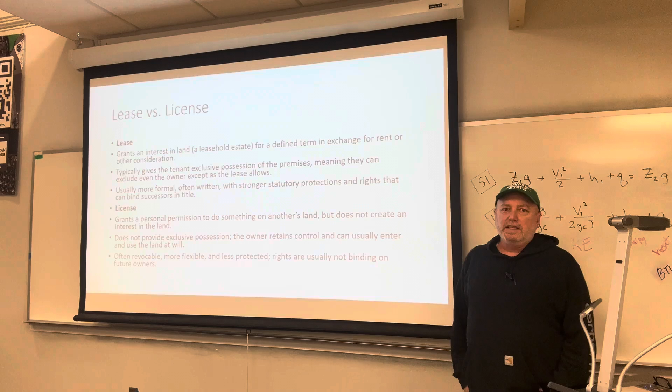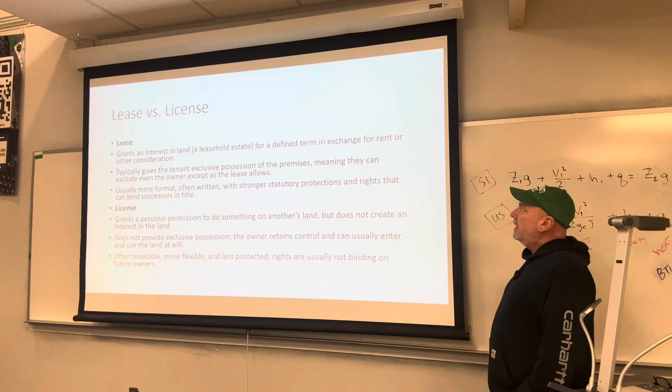This isn't in the book, but I wanted to touch on it at least: lease versus license. You can lease land, you can get a license. A lease grants interest for a defined term in exchange for rent or other considerations. Leases typically give the tenant exclusive possession of the premises, meaning they can exclude even the owner except as the lease allows. They're more formal, written, with stronger statutory protections and rights that can bind successors in title.

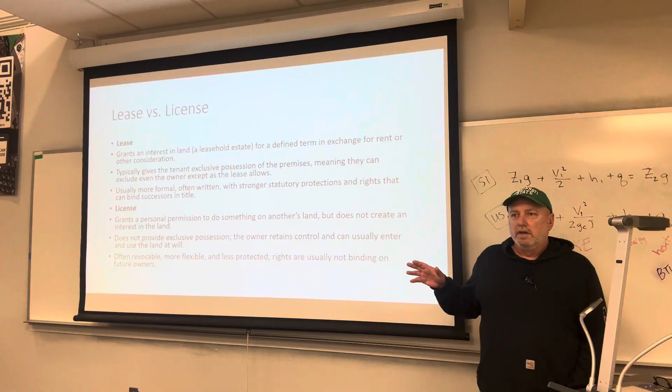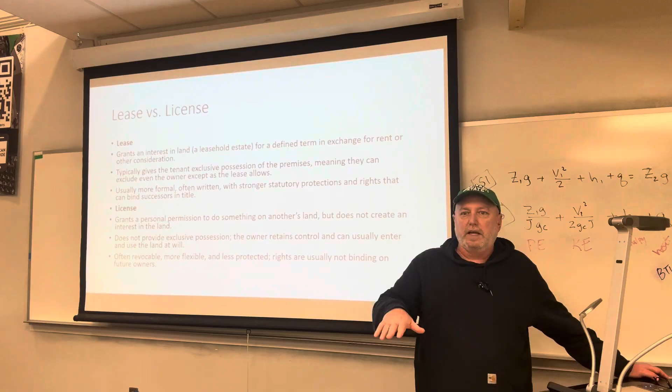As an example, some of you may be familiar with this if you're out in the more rural areas. A farmer has a 400-acre farm, maybe they're getting old, can't farm it anymore. They got a neighbor who's a young person with 20 acres. They could lease that farmland to the other person, and they have the right to come and use the land for farming. That's just an example, but it is defined as far as what you can use.

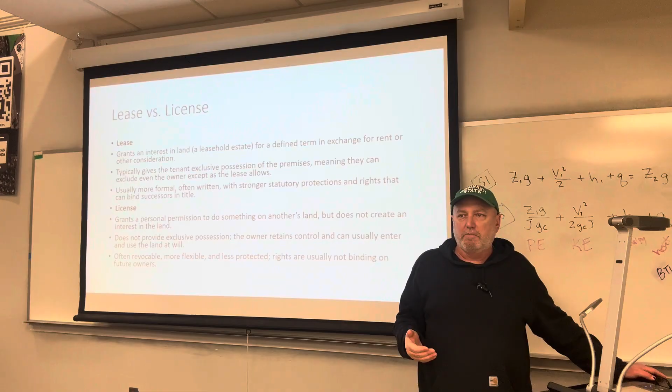I can lease that land to the farmer next door to come and farm the property, but that doesn't give him the right to come and build a house on it or build any improvements. If we specify in a lease purely for farming — maybe it even says raising corn, soybeans, whatever — it's for a specific reason and usually for a specific duration of time.

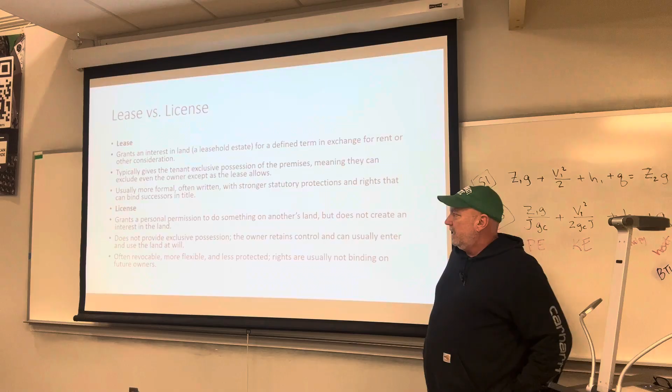You can get a license which grants you personal permission to do something on another's land but does not create any interest in the land. It does not provide exclusive possession. The owner retains control and can usually enter and use the land at will. It's often revocable, more flexible, less protected. Rights are usually not binding on future owners.

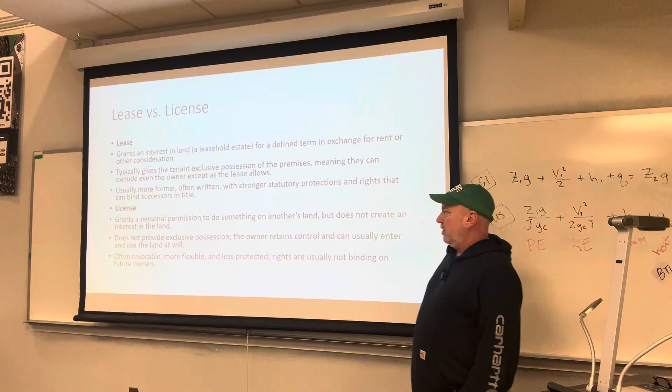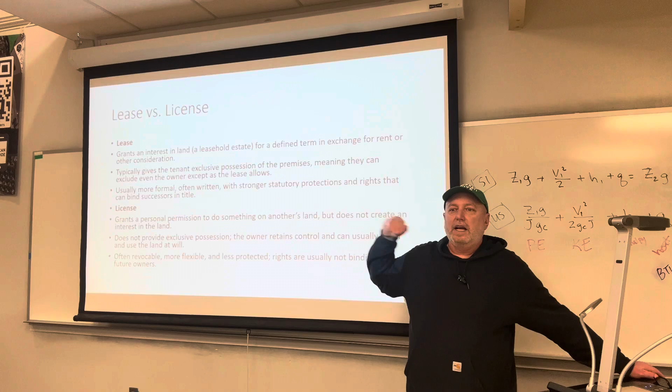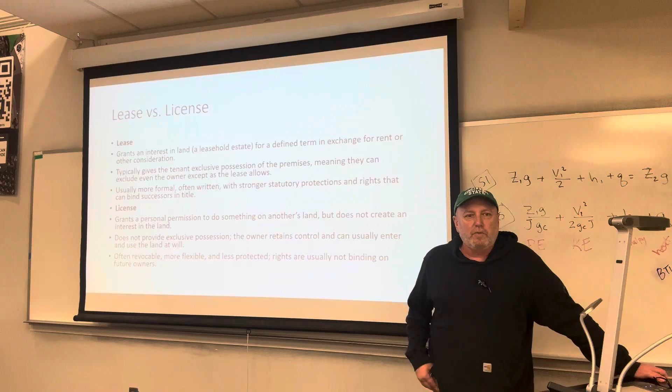Probably the easiest example I can think of, like the Cincinnati Bengals - any season ticket holders? You have to buy a seating license before you buy your seat. That is exactly what this is, a license. It basically grants you permission to use the land for a specific purpose. You can purchase your seats, and that's kind of the legal thing there - I guess how the NFL teams can justify charging you more money.

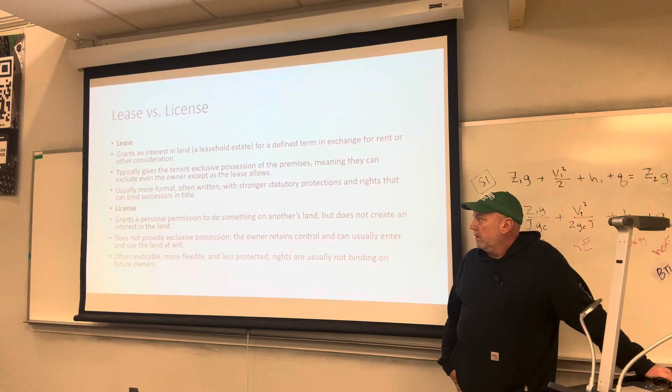But that lease and license, I just kind of wanted to touch on that. I think it's kind of an important thing to know.

Easements - that's also a very important thing we need to know. I think a lot of this stuff, as I was putting this together, I was kind of starting to get really deep in the weeds on like boundary law and stuff like that. And for you surveyors, you'll cover a lot more of this and more in depth in future classes. I at least wanted to introduce it to you now.

An easement is a right by grant or agreement which allows a person or persons to use the land of another for a specific purpose. It always implies interest in the land on which it is imposed. Black's Law Dictionary lists and defines 18 types of easements. Therefore, the exact purpose of an easement should be clearly stated.

So, for example, let's go back to the farms. I've got a big tract of land. My neighbor behind me has a tract of land. The easiest way they can access it might be a dirt road I have going down the property line that goes all the way back to the back property. I could grant them an easement of access. We typically, in surveying speak, would say an ingress-egress easement. It means access to travel back and forth. They have no other rights to the land other than to use that particular area for that sole purpose, just to get in and out of their property.

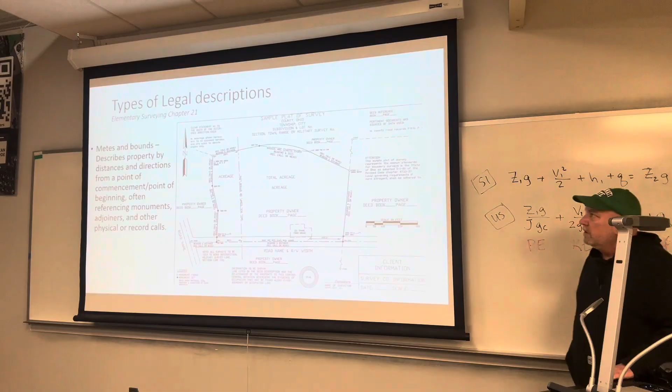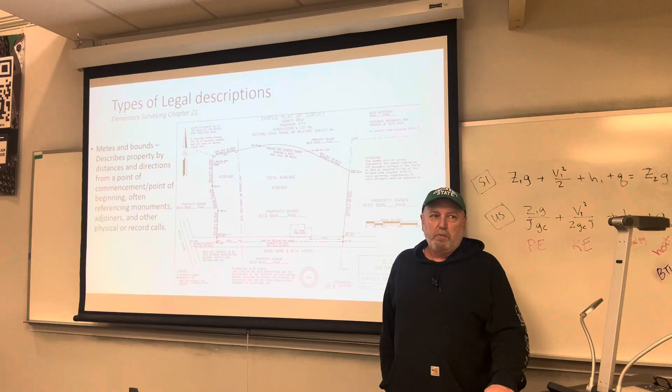So we kind of mentioned legal descriptions. There's a handful of different types of legal descriptions. First one here to talk about is a metes and bounds description. A metes and bounds description describes a property by distances and directions from one property corner to another, going around, referencing monuments, adjoiners, physical or recorded calls.

So I know this is kind of hard to see - this is a generic sample plat, and you'll actually have a copy of this specific example plat in your lab packet this week. The metes and bounds portion is the description. The metes portion of a metes and bounds means the bearings and distances and whatever other kind of information to describe the property line going around - your direction, your distance.

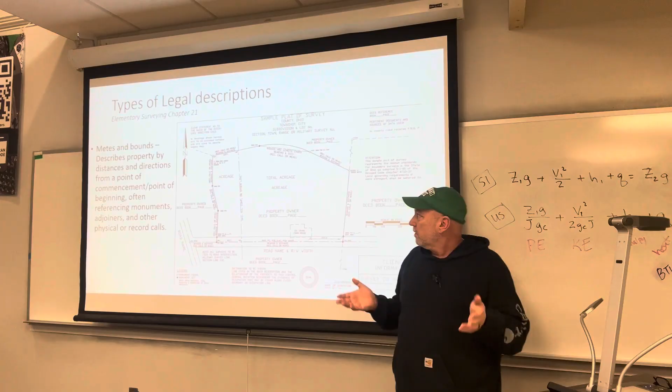The bounds portion of a metes and bounds description means you are labeling, listing the adjoiners - who owns the properties around you. In some very rural areas there are pure bounds descriptions. That literally says, if I'm standing in the middle of my property, I'm bounded on the north by this highway, bounded on the east by this farm, bounded on the south by some subdivision, bounded on the west by so-and-so's farm. That's very difficult to retrace and resurvey. It's just saying I'm bounded by these people or properties or roadways, things to that nature.

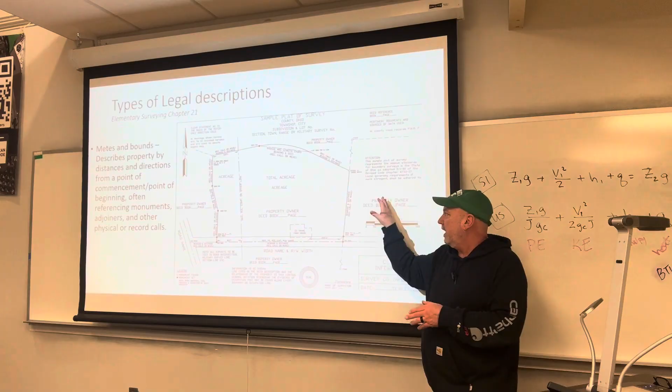The deed we'll have in our lab will have the metes describing the bearings and distances around the property, and also talk about the bounds as far as the adjoiners and what is up against our property.

So when you have a metes and bounds description, it needs to contain a few things. A description of land by metes and bounds in a deed should always contain at least the following: a point of commencement, listed as POC abbreviated on a survey or in a deed. This is an established reference point, such as a corner of the Public Land Survey System or the NSRS, the National Spatial Reference System, from which the property described is tied or referenced.

This requirement varies by state and by county. Some states, your point of commencement can begin at an intersection of two roads. Some places will allow you to begin at the corner of a recorded subdivision. It depends again where you are, if you tie to a section corner.

The next thing is the point of beginning. This is the actual point on which the boundary begins. It's where the description actually starts, where it starts going around the property lines, and it has to come back into and close that same POB. Does that make sense?

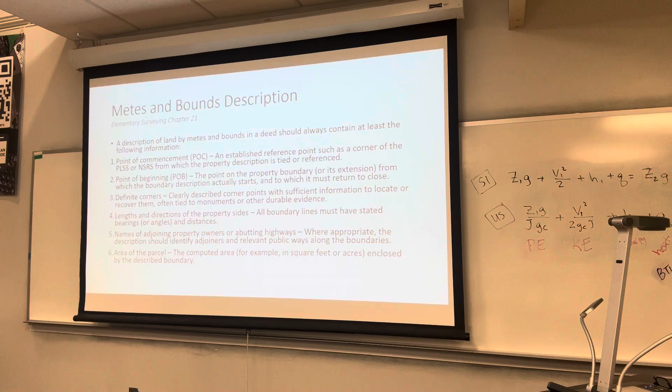And finally, the area of a parcel. So what is the computed area? How many square feet or how many acres does that property contain?

Anybody got any questions on any of this stuff? Anything, anybody?

Another type of legal description is a block and lot system. If you're in an actual recorded subdivision, this uses the subdivision plat describing the parcels by lot and block numbers within the name and record information of that various subdivision.

Situate in Section 20, Town 3, Entire Range 1 of the Miami Purchase, Springfield Township, Hamilton County, Ohio, and being Lot 2 of Block 3, Section 3, Brentwood Subdivision Plat, of which subdivision as recorded in Plat Book 72, pages 87 and 88, Hamilton County records, subject to easements, restrictions of record, if any.

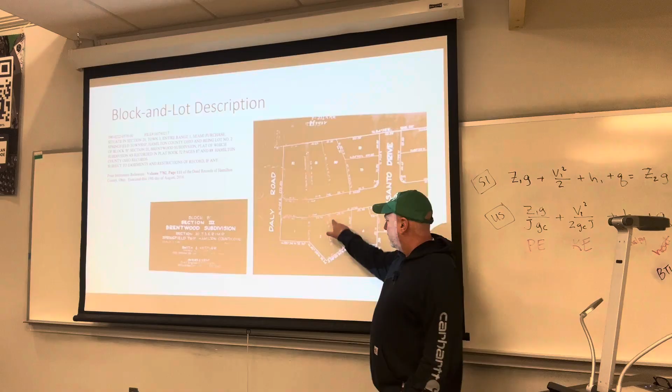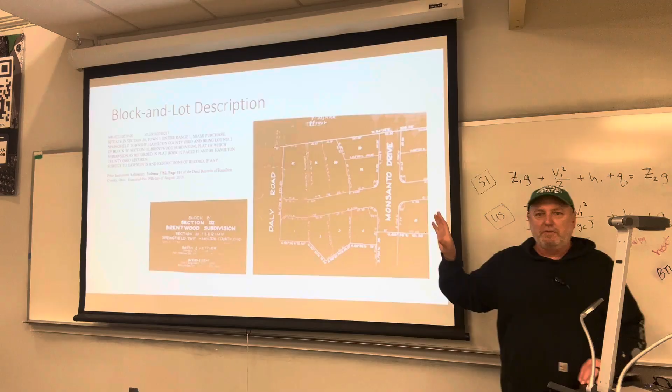Now this lot subdivision was early to mid 1950s, I think. Here's lot 2 right here. And it's the beauty of Hamilton County - some of these older subdivision plats are hard to read. I know it's hard to read here, but if you actually went to the recorder's office and pulled this, it's still going to be hard to read, just the quality.

This brings up an interesting thing I want to share. I always wondered this in my early surveying career. You'd go do a survey on a parcel and always went to the engineer's office to get a copy of the survey plat. Why in the world are subdivision plats in the recorder's office, not the engineer's office? That never made a lick of sense to me. But realizing with this style of legal description, that's why subdivision plats are together in the same recorder's office, versus one being in the recorder's office and one in the county engineer's office.

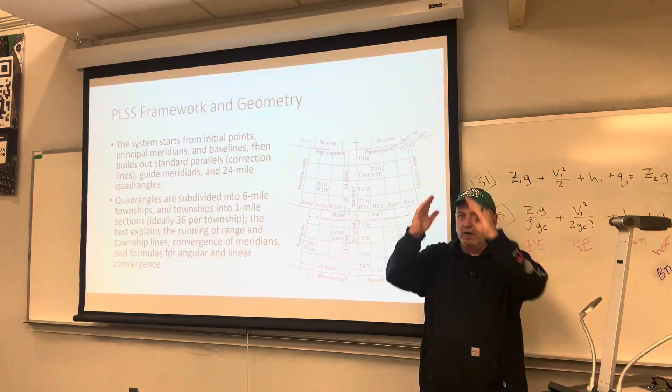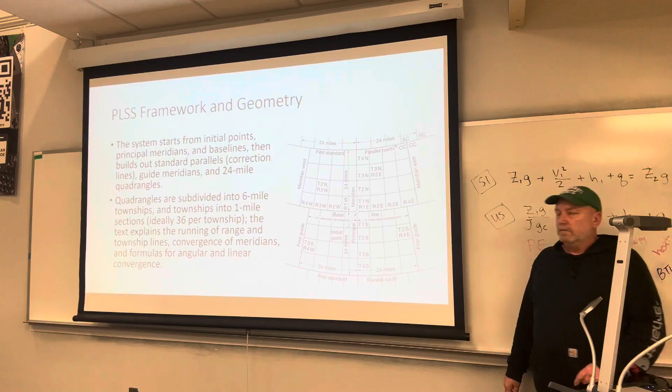This was even a thing back in the 1800s, even seen in Ohio. For example, they started down south at the Ohio River and started going north. As they went up north, trying to run meridian lines or true grid lines—meaning every line should be parallel—because the earth is not flat, these lines start converging at the poles as you get further north. Even in Ohio, as they would go up 24 miles expecting to hit 24 miles, they were always short. That's another reason why I always ask if there's any flat earthers in this classroom and want to throw them out if they are.

Section lines are pretty common in the PLSS area. A lot of surveys will reference and tie their point of commencement to begin at a section corner and run to the actual property itself.

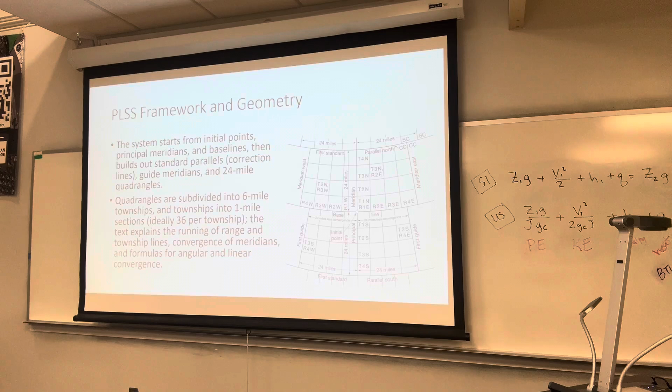Those of you who have taken history or will take surveying history will get into this more with Ohio. It's very unique in the country because there are a lot of different methods used to subdivide these range lines and townships down into sections. There are step-by-step methods given for subdividing these. They break these sections down into aliquot parts. A section is a mile square containing 640 acres. When you mention an aliquot part, you're breaking down that square section into halves, quarters, eighths, and things like that.

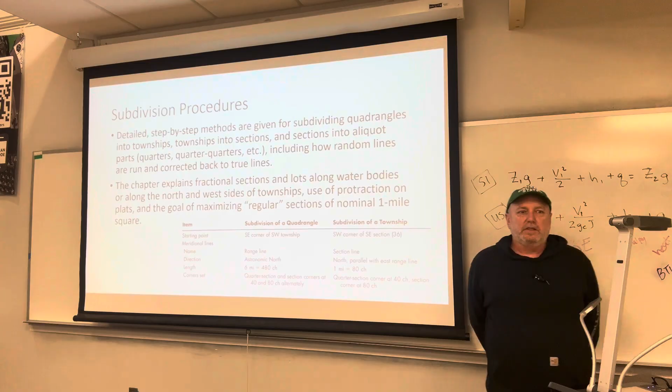So an aliquot description of a piece of property might say it's the northeast quarter of section 27, township 3, range 2, or something like that. That would be an aliquot description.

Your chapter also explains fractional sections and lots along water bodies or along the north and west sides of the townships, use of protraction on plats, and the goal of maximizing regular sections of a nominal mile square.

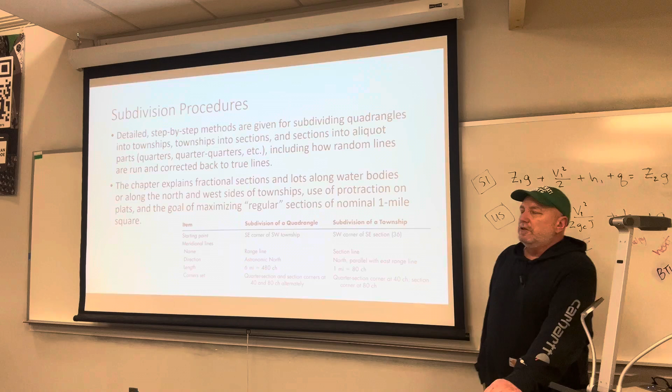A lot of this stuff kind of changed as far as their methods over the years. We're talking like the 1800s here. What they do more so nowadays is their starting point. They start at the southeast corner of a southwest township and start running north and start running west.

I really don't like how this thing bounces. That bothers me. I guess it's that thing. Read up, this is chapter 22, I believe.

Can you imagine trying to subdivide southwest Ohio, southeast Ohio, southern Indiana using a chain and compass to do this stuff? It was very difficult work to say the least. We have it so easy nowadays, just pull out our GPS and go, bop, there it is, go over to the next one, bop, there it is. That's nowhere close to 5,280 feet apart on them section corners.

I believe them government surveyors too even got paid by the mile, so not exactly like putting in an 8-hour day or putting in any overtime. It was how much can you run in that much time. You got paid for length.

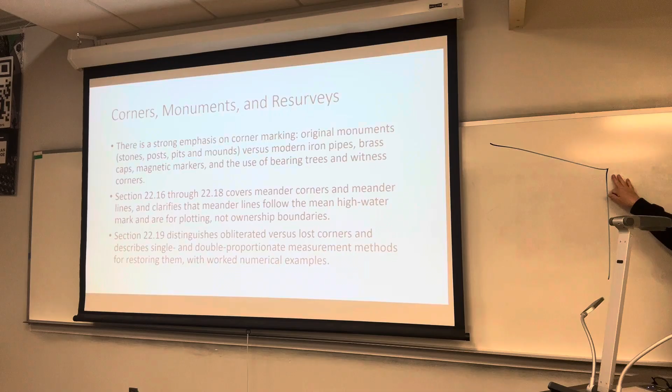Say, for example, if I draw right here, can everybody see this okay? You have a property line coming down to a corner and a property line going down here this way. Maybe wherever this actual property corner falls is inaccessible. Say we have a creek or something that meanders on around through here and goes something like this. We can't set the actual physical corner in the center of the creek.

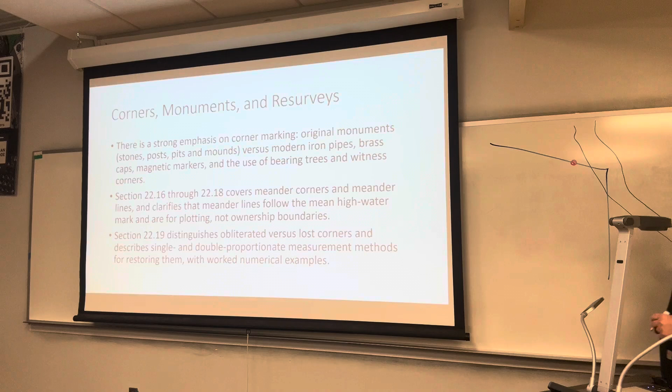God knows I've done it in my lifetime before, and it's a pain in the butt. So what we would typically want to do is set a witness corner. You're going to come back some distance and set a monument on the property line, some actual distance from the corner. What would be ideal is if you could set two of them, one on each property line, some distance from the actual corner. So that's a witness monument, a piece of monumentation that is witnessing the corner. It's not the actual corner, but it's specified some distance away from the actual corner.

I just want to bring that up and put a little emphasis on that because in the lab we have a deed to draw up, it does call for a situation like this where there's a creek running through and it's calling for witness monumentation. So at least I wanted to bring that up to your attention. Any questions on what that means? Got that idea down pretty decent?

Again, please read the chapters. Sections 22:16 through 22:18 talk in more detail about meander corners and meander lines. It clarifies that meander lines follow the mean high water mark and are for plotting, not ownership boundaries. This can also vary by state and municipality. Do you go to the high water mark or the low water mark? That's kind of an important one to think about.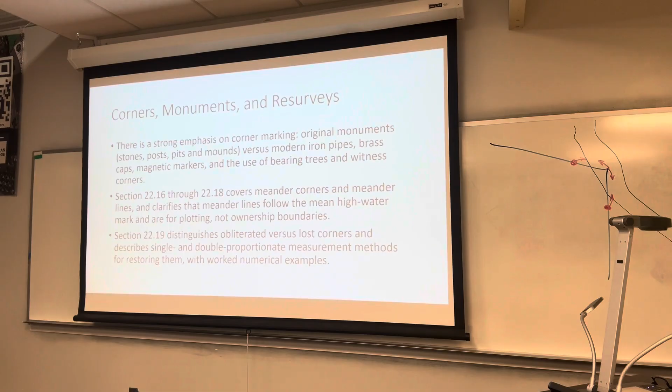In section 2219, it also distinguishes obliterated corners versus lost corners, and describes single and double proportion measurements for restoring them. What's a lost and obliterated corner, you ask? What's the difference? Oh, that's a great question, I'm glad you guys asked. We'll look at that real quick.

An obliterated corner is one where the original monument is gone, but its position can still be recovered with convincing evidence. A lost corner is one where the position cannot be determined beyond reasonable doubt and must be recreated by proportional measurement from other corners.

Does that make sense? I'm not going to lie, I still kind of get those two mixed up in my head occasionally. The obliterated corner - the monument's gone, however you can still recover its position maybe by other things, old witness trees, witness monuments around it. You could pull back in and find within reasonable doubt where that is. It can be restored using evidence - trees, fences, walls, things showing occupation, other witness marks, testimony.

And a lost corner, that little guy is completely lost - the position cannot be determined beyond reasonable doubt, either from remaining traces or from acceptable documentary or testimonial evidence. The way to return its position is to reestablish by rerunning lines from independent corners using a single or double proportion measurement to distribute the excess or deficiency between record and measured distances.

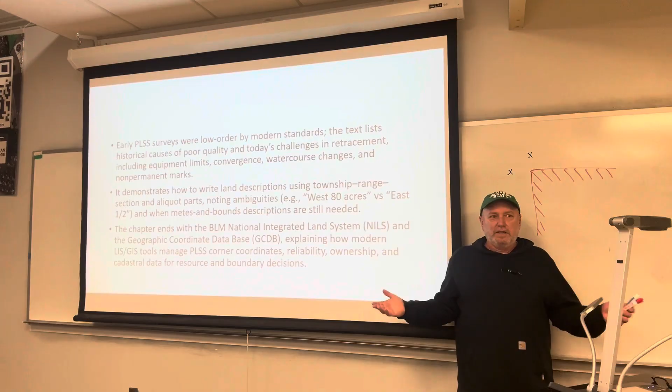There's also been instances where a deed or survey may call a tree a property line. I have seen where people will come off 5 feet from that tree and set a pin on the property line, 5 feet from where the tree is. Is that tree going to last forever? That iron pin probably will last longer than the tree. So if this was the property line and you got a tree here, you might set witness corners that way. I've seen that before. Some people may argue that's good practice, some may argue that's terrible—the tree's the corner, just leave it. Depends on the surveyor you're working for.

The early PLSS surveys were low order by modern standards. Think about this: they ran these lines with compasses and chains. We have measuring equipment that is technologically way more advanced now; we can measure a lot more precisely. So historically, depending on what part of the state you're in, they were run pretty decently. However, compared to today's standards, they're kind of lower quality.

That is not to say if you come across a stone that is the section corner, and by your measurements you're off 3 feet this way and 5 feet that way—that stone is an original corner, a section corner monument. Regardless of the quality of it, that stone is the location, period. That's going to hold over everything. Law courts will say that stone is the corner, even though the 1800s plat says it should be this distance, and when you measure it's really something different. That stone's location is going to hold, as an example.

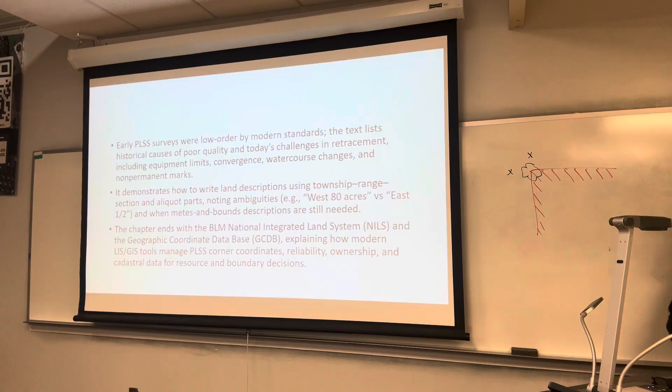Depending on where you go, some counties have records all the way back to when section corners were set. What seems to be a common problem is that some counties, particularly in southwest Ohio here—the land between the Miamis, Symmes Purchase—Judge Symmes kept all the original survey data and records at his house or somewhere similar. Wouldn't you know, a lot of these wooden structures caught fire, seemingly regularly. Courthouses built of wood caught fire, and a lot of old original documents and records were lost to time.